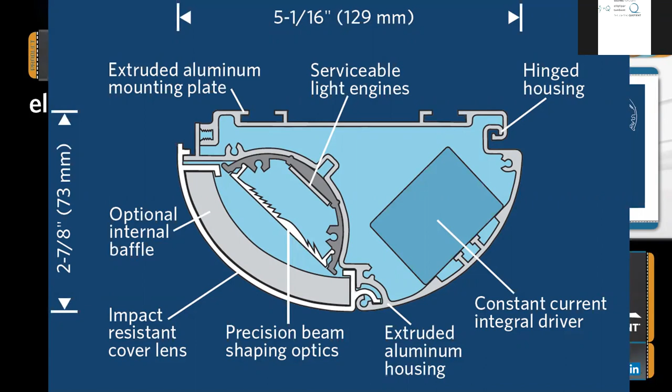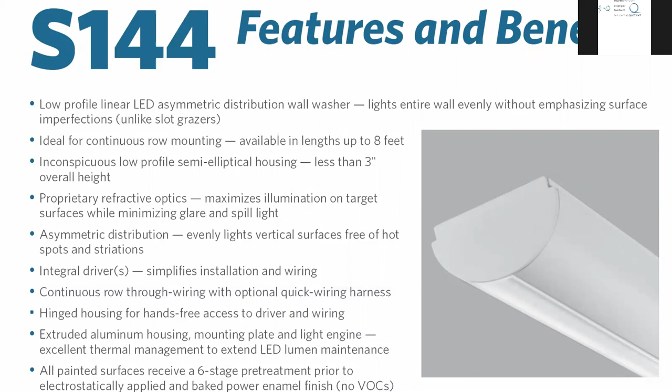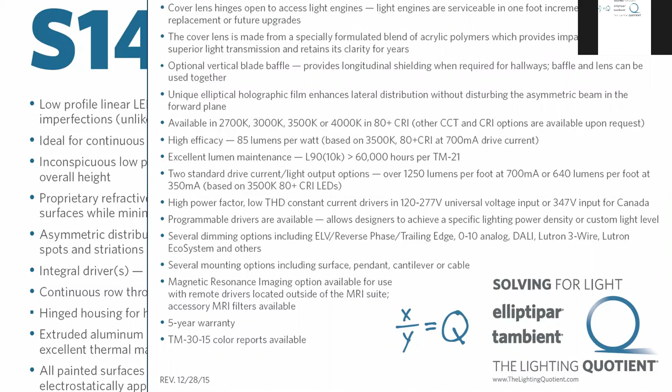Also on the website, you can access a list of benefits which go through the different lengths, some of the uses, some of the features of the drivers, dimming, what's available for color temperature, CRI, so that's all accessible on the web.

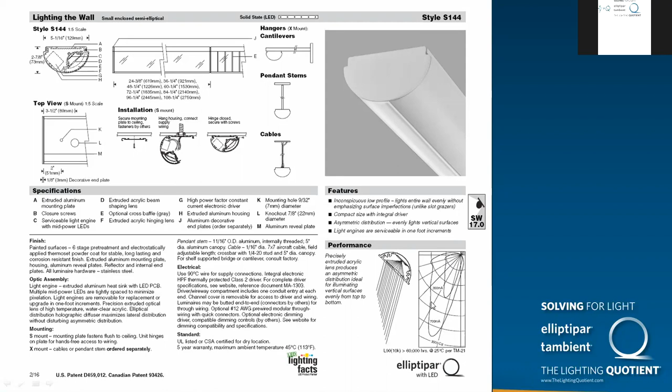The catalog page is similar to what you've seen. It's a two-page data sheet with line drawings, dimensions. It shows just kind of a brief overview for surface mounting. We have specifications, thumbnail of the candle power curve, as well as some features. On the back side is all of the specification information on how to order the product, and I'll take you through each one of these.

The product is available in 2-foot through 9-foot lengths, and we offer it standard in 2 drive currents, 350 milliamp or 700, and you can see this data for the wattage and the lumens is based on 3500K 80 CRI. So with the other color temperatures, you will have different lumens.

The wattage will be the same, but you'll see that there is a hyperlink here where you can access a performance table. It's a 2-page table which goes through all the different lengths and all the color temperatures, as well as the 2 different drive currents.

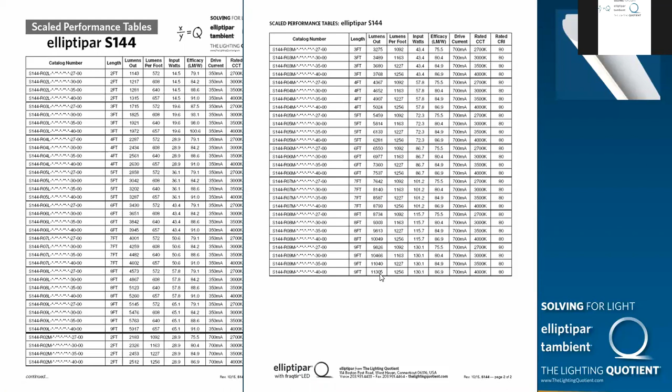So you can see the range of light output for a 2-foot unit at 350 milliamp, 2700 K is going to be 1143 lumens, all the way up to a 9-footer, which is over 11,000 lumens at 4000 K80. So there's a wide variety of lumen packages.

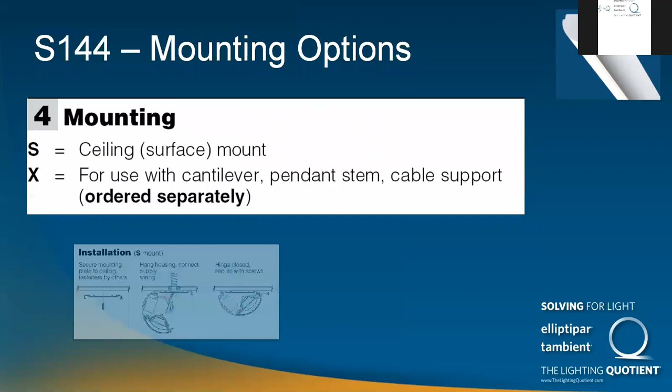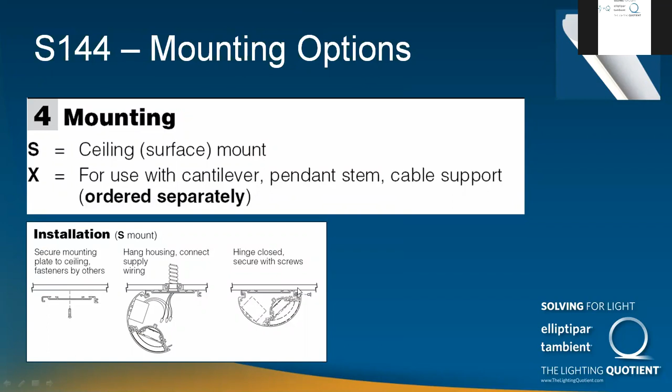Moving on to the mounting, there's a surface, the S mounting code, which is just for ceiling mounting directly to the surface. Conduit entries on the top to bring direct feed. This is a detail of the S mount, just showing the mounting plate attaching to the ceiling and how you can swing the fixture open to access the wiring and then closing it. The X mount will be used with the cantilever accessory, pendant, or cable support, which are ordered separately.

We offer 2 finish codes, a semi-gloss white and a matte white. The matte white might be more appropriate on a sheetrock ceiling that's painted matte white. It tends to sort of disappear when it's surface mounted. We also offer finishes, the RAL colors, or if you have a sample chip, you can send it in to us and we'll get it computer matched for our powder coat system. Color is available.

It's been changed for a 1 and a 2 voltage code for 120, 277, and T and V for dimming. Since all the drivers are now universal voltage, we offer an 8 for 120 through 277 and an N 120 through 277 for dimming. We will be adding codes for 347 soon.

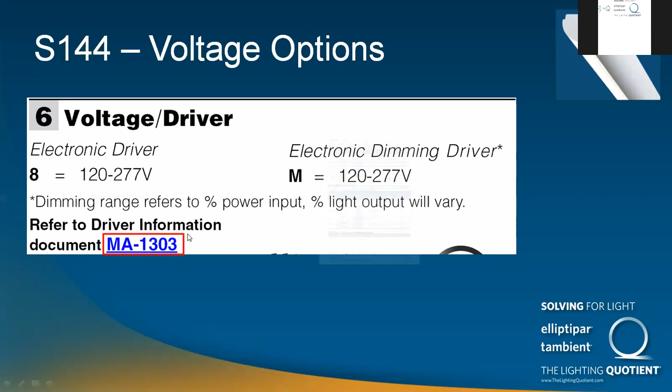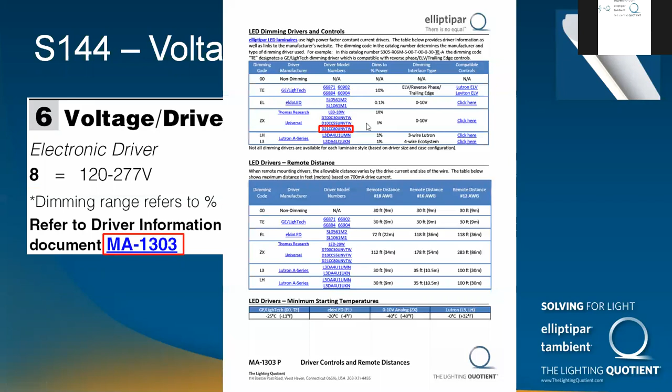Under this area, you'll see MA 1303, which if you click on it, it will open a document that is all the driver information. So it gives you the drivers, what compatible controls are used with them, the remote distances, minimum starting temperature, and if you want to actually open a spec sheet, you can, on a hyperlink, it will open. This is an example of a Universal Lighting Technologies driver. So there's many options and hyperlinks that go to compatible controls. So there's a lot of useful information on this.

Next, options. As I mentioned before, all the fixtures come with a clear lens, but you can have a combination of a clear lens and a baffle. So if you have long sight lines down a hallway where you want to minimize views into the fixture, we offer the baffle. We also have the LK option, which is for when you have long rows that are mounted end to end. The LK is an option for pre-wired modular harness, so you can feed the first fixture and then just build the row from there. And then the LC is actually a combination of the baffle plus the pre-wired modular harness.

LM is for MRI units. In this case, the drivers have to be remote mounted outside of the MRI suite. So that involves a little bit more information. So it's always best to consult the factory before specifying that, because each driver's output has to go through an MRI filter, which can get expensive. So we have ways of minimizing the number of filters.

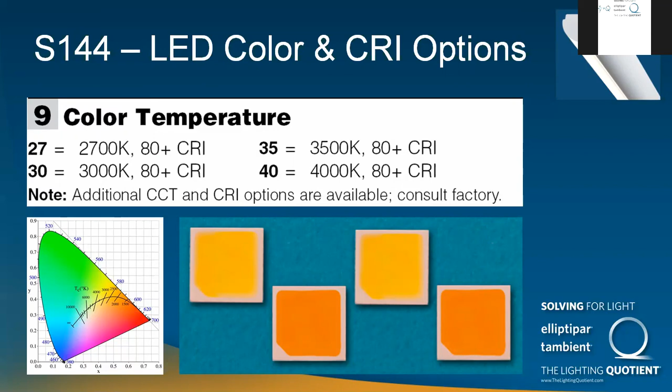The next option is color temperature. We offer 2700, 3000, 3500, and 4000 in 80 CRI. That's what we are cataloging today. If you have a need for 90 CRI, we can get that, and there are minimum runs that we have to do to get the boards, but because so many are used in a linear run, it's usually not that big of a deal. Special color temperatures or higher or lower CRI are available upon request.

The dimming options are laid out here, with 00 being non-dimming, but TE is the GE 2-wire, so it works off a standard trailing edge, reverse phase, ELV dimming control. Dims down to about 10%. The ZX is a 0 to 10 analog dimming, which dims down to about 5%, and it works off of standard 0 to 10 volt controls.

The L3 are Lutron dimming options. The L3 is for EcoSystem, and the LH is for the standard Lutron three-wire dimmed hot controls. We also have two eldoLED options. eldoLED EL is for 0 to 10 controls, and ED is for DALI controls. What's nice about the eldoLED is that it dims to dark, so it's in standby mode when it's fully dimmed.

The other thing I should mention is, as far as the drive current, even though we only catalog a 350 and 700 as our standard, we can program many of these drivers to a specific drive current, which will result in, maybe you need to hit a watts per square foot target, an illuminance target. So that is available. Don't be afraid to ask for that. We can easily get the drivers. We can program them here to pretty much any drive current.

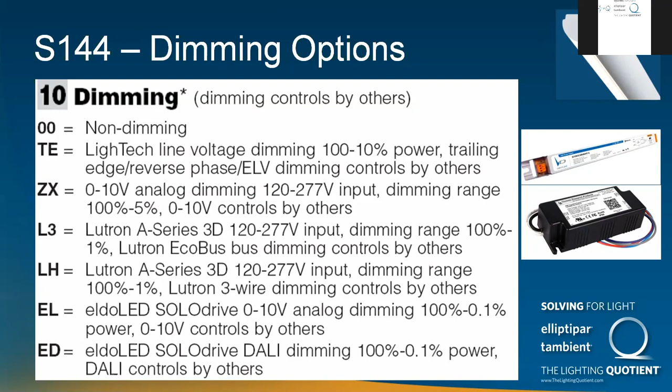The hangers are, as I mentioned before, with cantilever pendants and cable supports. Just note that they are different than the S144 fluorescent. They're slightly different, so they do have different ordering codes. And the other accessories are the decorative end plates. So on a continuous run, you really only need one set of end plates, because in between fixtures, you don't use the decorative end plates.

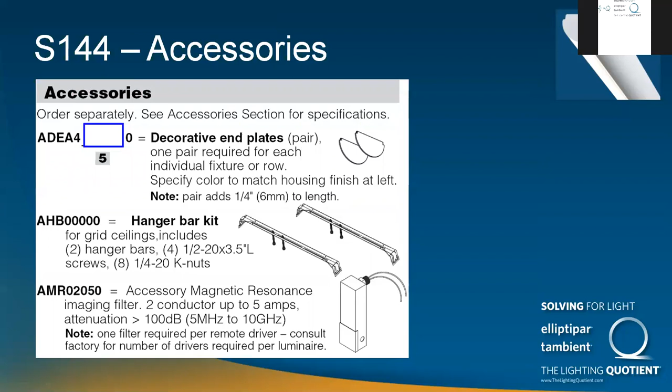We also offer a hanger bar kit for accessible ceilings or T-bar ceilings. And then this is the accessory for MRI filters, which I mentioned before. So each output on every driver would have to go through one of these. So it is best to consult factory before you specify that.

I'm going to let Zach take you through the website where you can find most of the... highlight where things are at, and some of these you've already seen in previous slides, but just to link it. This page view is if you went and clicked the products button and then selected the quick finder. So by entering the 4-digit style code, you'd be presented with a page like this. And the top choice at the right is the data sheet, which is that black and white cut sheet that Paul already illustrated when he highlighted some of the selections you can make.

Underneath that, you'll see listed the product fact sheets, and probably the most prominent item there is the color cell sheet, which is listed at the top. So again, you've seen this, but just to show you where it resides on the website, that's how you'd link to it. You'll see the scaled performance table. That's also available as a direct hyperlink from the cut sheet, but somebody coming into this part of the site can find it. There's the lighting facts label, and at the bottom, there's also a selection for the TM30 color data.

If any of you sat in on any of the webinars DOE or others may have hosted on the subject, TM30 isn't, in a sense, officially adopted yet, but IES did put it out there seeking reaction from a variety of parties. You have CIE issuing a statement saying they will review this, that they see that it offers some benefits, but they haven't officially endorsed it yet, nor have other groups. So it still remains to be seen where this goes in the future, but nevertheless, we've been surprised in a short period of time by the uptake and the number of questions we've had from people saying, can you illustrate the data in this format? So if you select that under this product facts guide, there's a 7-page PDF available for each of the color temperature and CRI combinations.

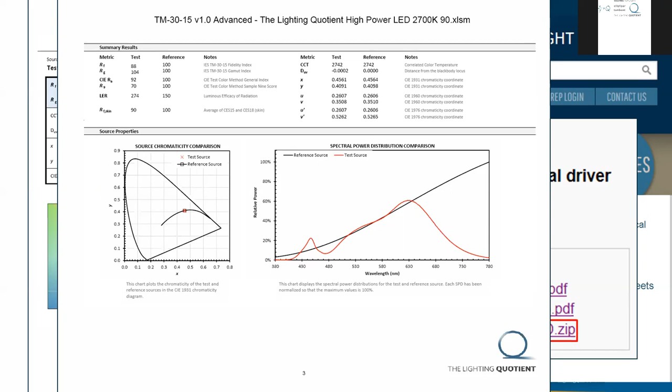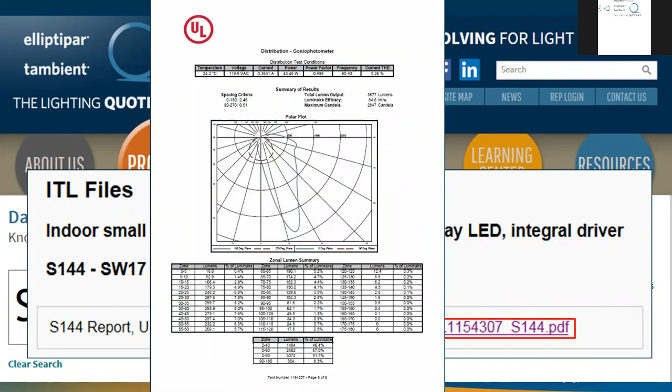For those wanting to check out photometric information outside of an IES file, there are PDFs available, or the main PDF of the independent test lab. In this case, rather than ITL, it's a UL test, but that information is available for anyone wanting to see it in that format. For those making use of AGI or other software programs, the IES files are broken down into a series of zip files. And there are 8 of them, essentially seeing both drive currents, 350 milliamp with an L call out, 700 milliamp with an M, each repeated in terms of the 4 color temperatures, each at 80 plus CRI.

The point here is that once you know what color you're interested in, you would select that. So in this example, we're going to hone in on 350 milliamp, 2700 Kelvin, 80 plus CRI, and that zip file then contains all the available lengths. So someone doing an odd row length in a model, if they need to comprise a 21-foot row, rather than having to take one file and mutate its length and adjust the lumens, you can essentially go in here and pick 3 7-footers if that's what's going to give you the row in your model, and not have to go through that fussing. So just trying to make their life a little bit easier.

For those using Revit, if you select BIM file, there is a zip file containing a Revit object for the S144. It's set up as what they call a face-based object.

In the architectural package, placement is done a little bit differently than in the MEP Revit package, so this format kind of makes it more compatible with both. If you find you have a designer who's interested in doing something more sophisticated, if they're really using Revit to do a sophisticated rendering, they need more photometric information, please reach out to us, and Alan Tweed in the applications group is a great resource for dealing with those issues.

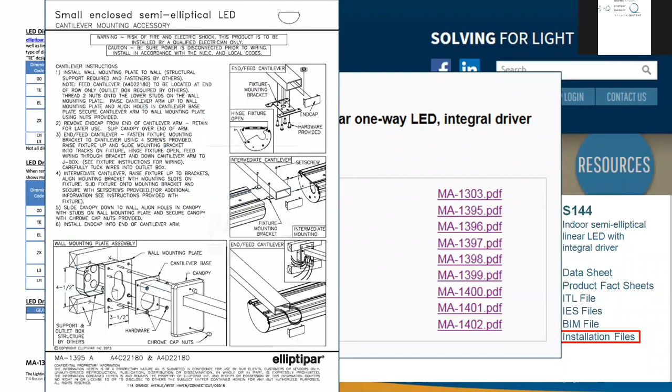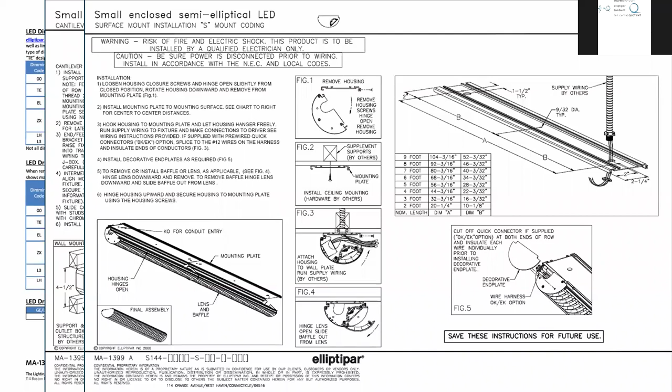Here you see the installation sheet for the cantilever mount, moving on to the pendant mounted and the aircraft cable kits. And then related to all three of those, there's an on-center spacing, which is just documenting for each of those accessories how somebody would plan out the on-center mounting points. And probably the most prevalent use will be the S-mount, and here you see what Paul described, the mounting plate, the hinge-on or hook-on housing, and how that mounts, installs, and is wired.

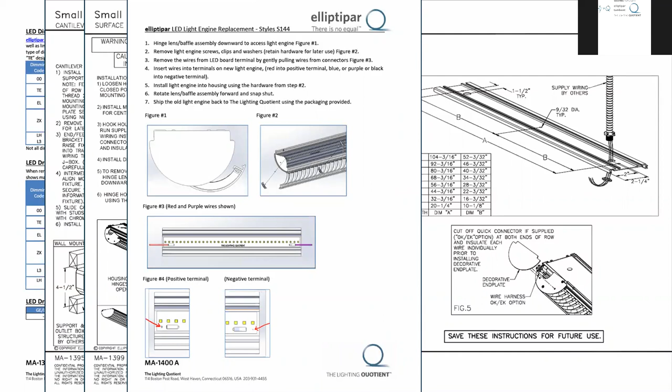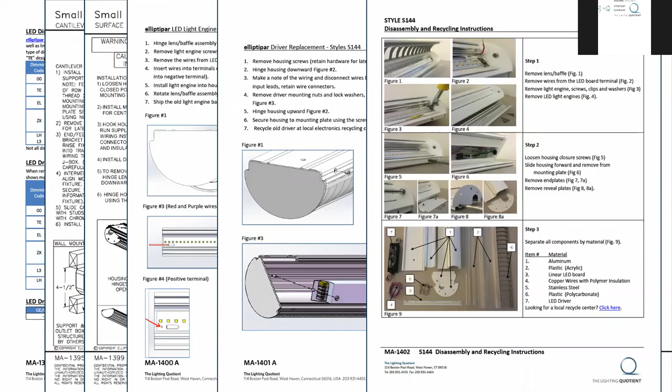There is a sheet dedicated to driver replacement, or in this case, this is the light engine replacement, followed by the driver replacement. And for those thinking ahead, also a sheet related to disassembly and recycling. Finally, there's a large configurator, which will let you get to a page where you can start to select a product, in this case, obviously S144, make specific selections and view pricing information.

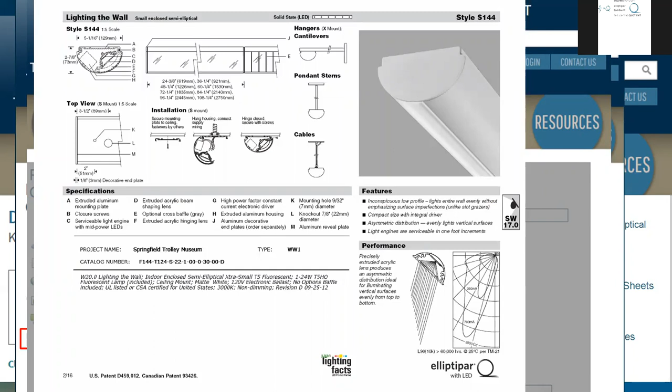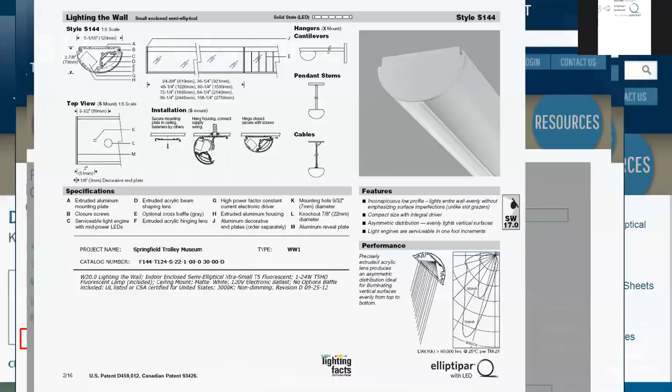This display is as if you're a designer making use of it. So you don't have visibility of the pricing, but you can still make specific selections, select cut sheet, and then generate, in addition to the name, kind of a tailored cut sheet that would, in this area, have specific notes related to 21-foot and 48-foot continuous runs, or, given that 347 volt isn't shown today on the cut sheet, a requirement for 347 volt. So that can be a nice feature depending on what the designer is doing and what they need to call out. In terms of general performance and life and lumen maintenance and distinguishing between the LEDs, Paul's going to talk about that performance.

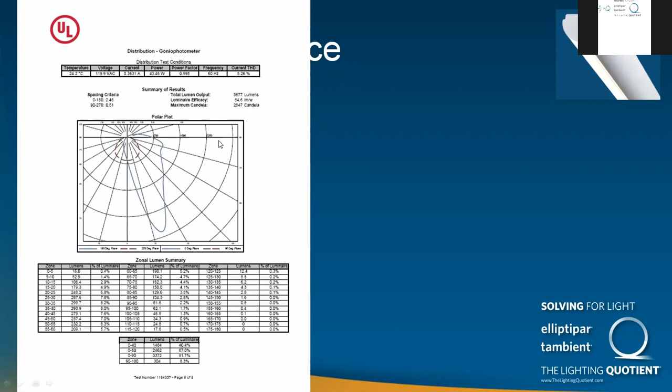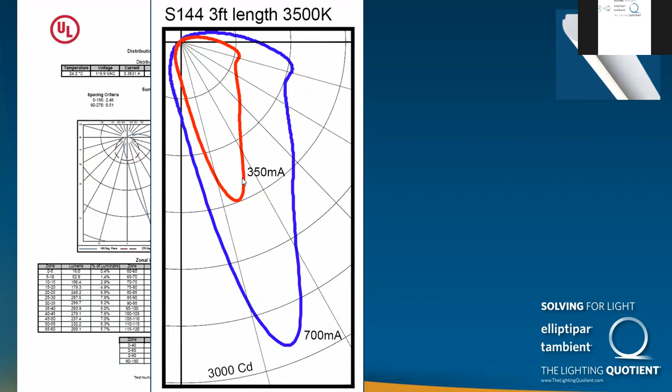Okay, thanks. Zach brought this up a minute ago, but this is the page for the photometric report. So it's showing the candela values, candela curve. You have your input power as well as THD, things like that. It's an 8-page report. I'm only showing one page right here, but it is used to generate some of the curves that are on our catalog page. This is just showing the 3-foot unit at 700 versus 350, so you get an idea of the difference in light output and scale.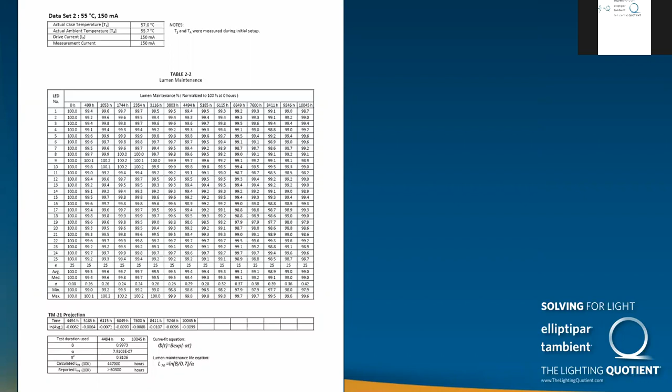So they have a large group of LEDs that they measure every 1,000 hours. They will measure the light output, the forward voltage, and the color. And this is kept over 6,000 hours. In this case, it's actually done over 10,000 hours. This is the mid-power LED that's used in this product. This is a test that was done at 150 milliamp. Even though we're saying 350 and 700 milliamp, that is the drive current coming out of the driver, but what's actually running through the LED, because of the way it's circuited, we're running at about 117 milliamps.

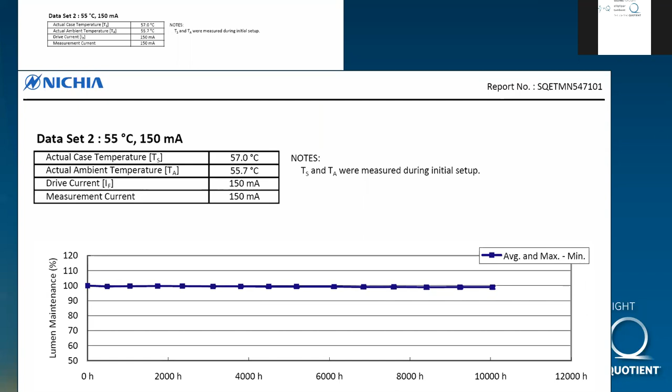So this is what it gets correlated to. So you can see the light output, the lumen values are very steady over 10,000 hours. You probably won't find any LM80 data reports that go beyond 10,000 hours because it's a very expensive test for the manufacturers to do. And then by 10,000 hours, they're probably on to the next chip anyway. But that's important when you correlate it inside TM21.

So the next step is the ISTMT, which stands for In Situ Temperature Measurement Test. It's taking our fixture, the complete fixture, and installing it and measuring the temperatures, let it heat up over 4 to 6 hours, and then they'll measure the hottest LED as well as the driver. And in this case, the hottest LED was 49 degrees.

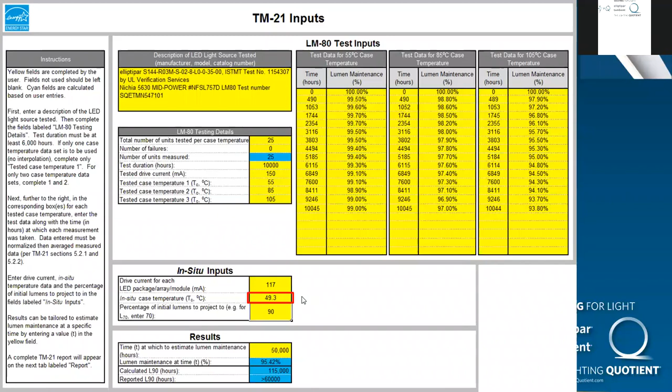Put it into the Energy Star TM21 calculator. It's a spreadsheet where you enter all the LM80 data that I just showed, different case temperatures. And then we also enter in the temperature of our LEDs, and it will calculate, in this case, we've asked for not L70, but L90, which is how long will it take to get to 90%. And it will calculate 115,000 hours, but its reported value is greater than 60,000 hours.

And the difference is you really should only report no more than 6 times your actual tested time. So if they have 10,000 hours of real test data, you can't project beyond 60,000. They have since removed the calculated hours because it had been grossly misused in the industry. So if you download the latest version of the Energy Star spreadsheet, you won't even see it calculated anymore.

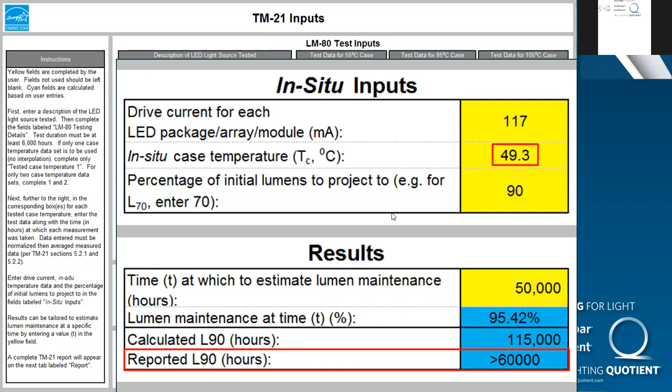The other line is, this is what's on the lighting facts label. The time at which to estimate lumen maintenance, 50,000 hours, and it will tell you that it's at 95% maintained light output. So it's 2 ways of looking at the same data. One of them is how much light will you have at 50,000, and the other one is when do I get to 90% light output? And it's greater than 60,000 hours.

All right, now Zach's going to talk about some applications for the S144. Yeah, we're getting near half hour here, but just briefly to talk about uses. We obviously don't have a lot of photography of S144 since we're announcing the product today. However, it's probably not a surprise to say we envision it being used where the fluorescent F144 had traditionally gone. And one of the classic examples, those of you who have had our case study books over the years, the pedestrian corridor at Nashville Airport was a good example of where the F144 fits so naturally.

They had a detail that had supported MR16 track. They were looking for a linear system that would light the walls evenly, even though the existing drywall would only let the fixtures come out 22 inches from the wall. And they wanted something that could surface mount and through wire easily because they didn't want to interrupt or poke into the existing drywall more than they had to. So naturally, a through wired surface mounted product really fit that situation. And again, the S144 would do the same now.

We also envision it going into classrooms where you have whiteboard conditions, pin-up boards, teaching walls, things of that nature, and sometimes conditions where you don't have a lot of plenum depth to play with, and or grids that aren't always orthogonal to the wall. So again, having that surface mounted through wired product makes life much easier.

In office environments, we had seen it in the past used not necessarily for fine art displays, but corporate art, prints hung on a wall. The image you see on the right is a law firm's office where they had perimeter shelving in several areas and chose to do that with the 144.

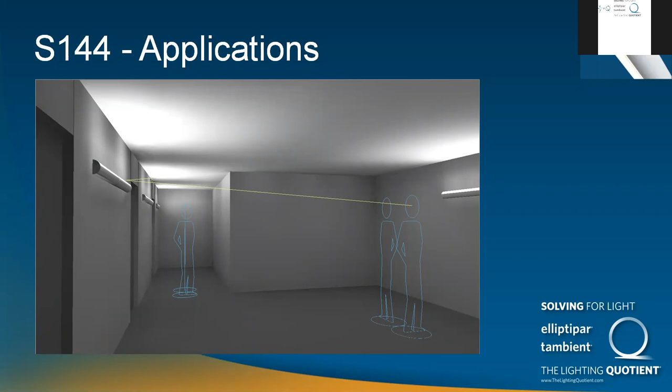Just to say that it doesn't necessarily mean you couldn't use this wall mounted in a wider space. Here's something that came in recently. It's a recreational pool. The mounting height is about 13 feet. So the thought here was the fixtures are at such a height, you really have to start to look at them, and the space is just so large, it's not really the most prominent element.

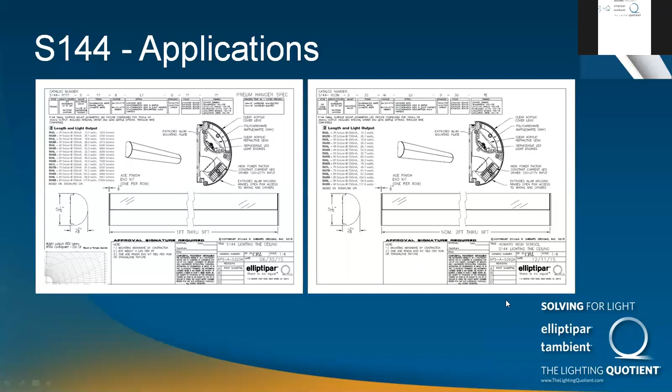We may very well choose to create a second cut sheet that illustrates this, photographed, oriented as it would be to light the ceiling. But in the meantime, if you have someone who is interested and you show them a sample, we have a generic submittal drawing in black and white we can provide to you. And as you see on the right, we could easily customize that with a project name and specific selections if you have a project that's more imminent.

Finally, on the subject of applications, because we're already 3 minutes over, with the products that have come out that are linear LED in the past, we were frequently saying the 350 milliamp version acts a lot like our traditional T5, and the 700 milliamp acts a lot like T5HO. Things have shifted a little bit here. I'm doing some simplified math here of whether the fluorescent version was lensed or baffled, because you couldn't do both together as you can now with the LED.

But the 28-watt T5 was around 1,450 delivered lumens by the time you took the lamp lumens multiplied by the fixture efficiency. The T5HO, 2,500 lumens. With the S144, the 350 milliamp version at 20 watts is essentially the equivalent of a T5HO now. And if you went with the 700 milliamp, it's actually well beyond, it's nearly twice a T5HO.

Now that's not to say there might not be a super graphic or an application where you need that much light, but it does create a different relationship to Paul's earlier point. If you really have a situation where you think that lower T5 kind of output would have been appropriate, that's a situation where we may make use of the programmable drivers just to set this at a lower wattage use and a lower light output if you have that need.

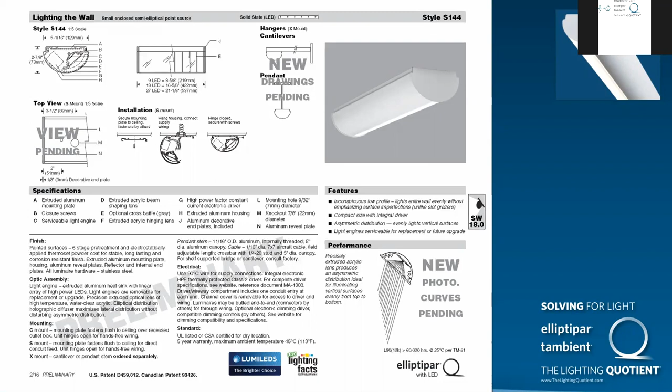This will be used with several more options as far as the color temperature and CRI, because it is using the high power LEDs. But again, it's the same small, low profile, under 3-inch profile, and it's going to be available in the 3 sizes, the 2 drive currents, but again, programmable drivers will let you tailor to a specific lumens per watt or to a delivered lumen value.

So look for that in the coming weeks. We're still wrapping up some of the photometric testing, but it should be coming very soon.

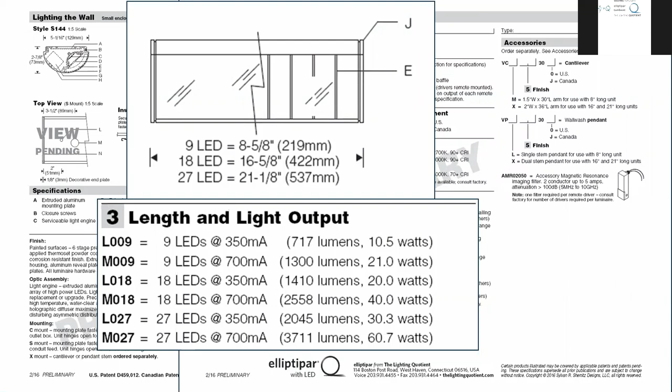If you can bear with us just a couple more minutes, we do have a few physical props. So as Paul was saying, switch, do that. Or okay, have I already done it? So I'm going to turn the video on, and we'll be able to show you some of the sample. As far as the small fixture that I just mentioned, here's a sample of the unit with a baffle. It's the 8-inch unit. It's about 20 watts at high power.

As you can see, the baffle actually is a true accessory, so it can be removed. The lens hinges open and it shuts. To see a better view of what the extrusions look like, a cross section of the extrusions, you can see the light engine inside. That is serviceable in the linear unit in 1-foot increments. In this unit, it's pretty much a 1-for-1.

Now, you might ask yourself, why didn't you make it smaller? There are drivers such as the eldoLED that have to fit in there, which take up all the space. So having an integral driver and through wiring for the linear is a great option. You can also see the hinge here, so this would be mounted in it.